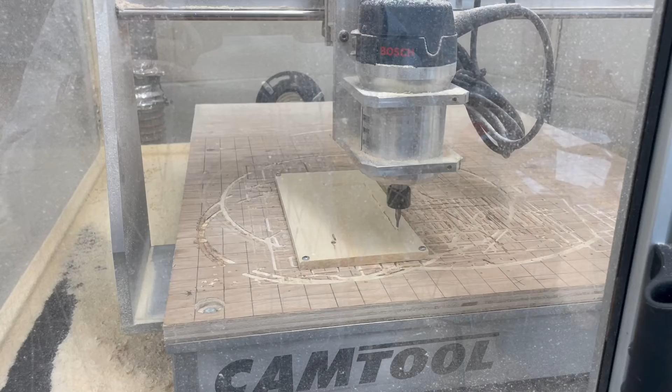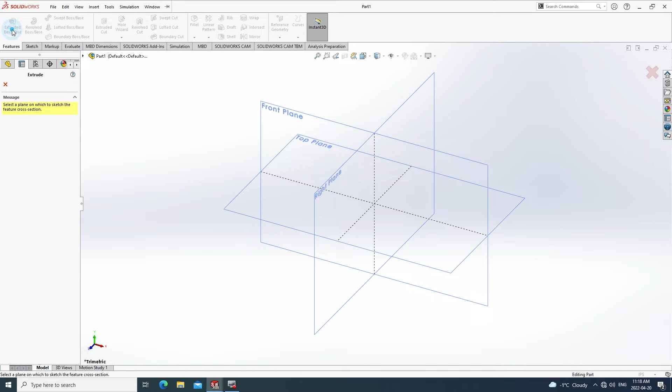This is going to allow us to select the plane, and we're always going to be working on the front plane. So we can just go ahead and click on that. And then from here, we're going to use our origin. So this is our two arrows that point straight up and to the right of our screen. And I'm going to go ahead and select rectangle and go back to my origin and click and drag out, basically creating a square on my screen.

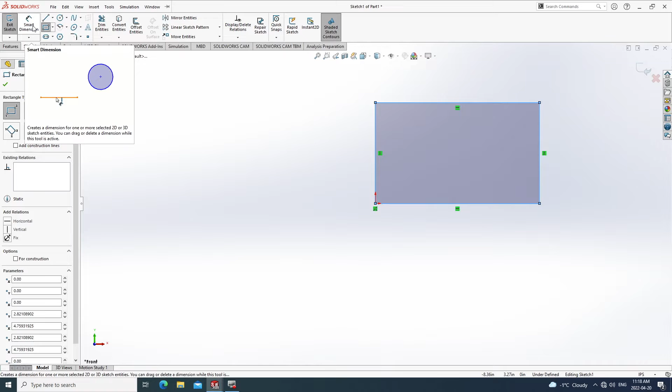From here I can just click again, and don't worry about dimensioning anything right now because we can go back and do that just shortly after, which you can see me doing here now. So I'm hitting Smart Dimension, dragging out either side, and then I can just go ahead and type in. Once I click, it allows me to type in however high I want my object to be. Then I can go ahead and do the exact same thing for the bottom here.

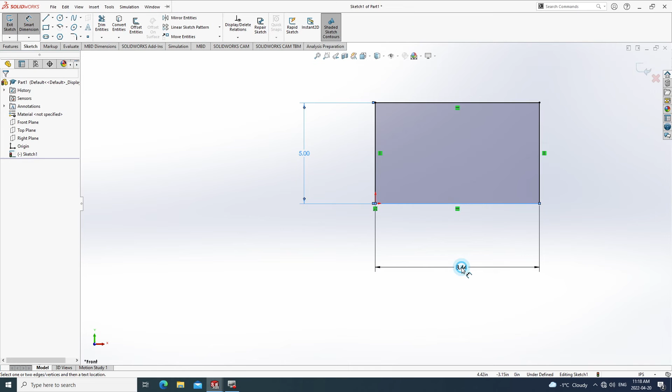And this is the way that I'm going to do all the height and depth and everything like that when it comes to creating objects in SolidWorks. I'm going to go ahead and leave the sketch. That's this button in the top left corner here. When I leave the sketch, it allows me to extrude it so I can push the object back and create some depth.

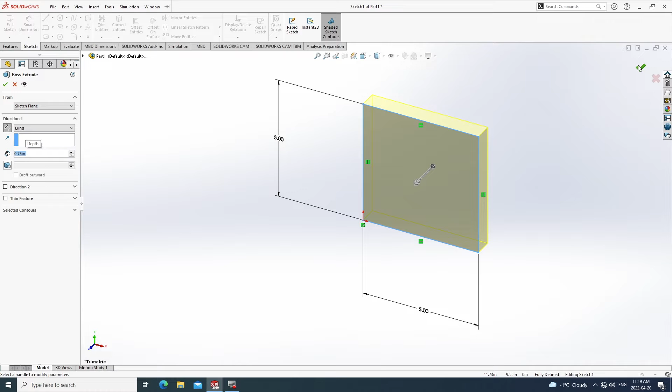From here then, I can go to the side and I can decide how deep I want my object to be. So this now is slowly starting to look more and more like an IQ tester quiz. Then I can go ahead and hit the check mark here in the top right corner, and now, as you guys can see from doing those 4 or 5 small little steps, I have an object.

So now with our IQ tester, what we want to do is create our holes. So by doing this, we're going to go back and click on our sketch and select circle. We're then going to have to decide what face we want it to be on, and obviously we're going to select the front. So we're going to first draw a circle, and then we're going to go and smart dimension that circle.

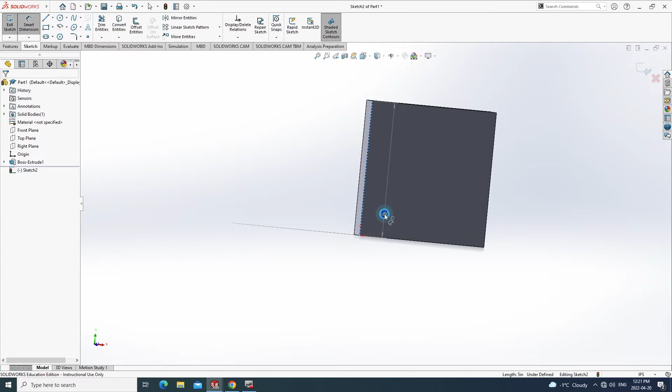From here, we'll go back, click on Smart Dimension, and we can click on the middle of the circle and either side to tell the program how far we want the circle to be off the side, off the bottom, and then we can also do the radius, all using Smart Dimension.

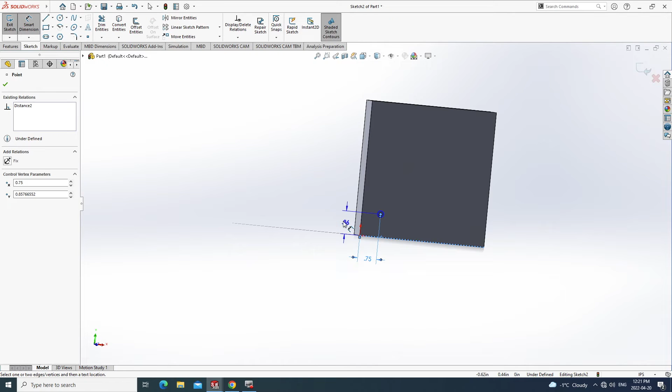So here, I'm just going to go to the side. I'm going to type in how far out the distance I want my circle from the edge, 0.75. And again, I'm going to do the same thing for the other side. At 0.75. And then I'm just hitting enter. So now we got one circle almost done.

Let's grab the radius. So we're going to click on the edge of the circle and drag out. This one only needs one click. And then we're going to type in the radius of our circle and hit enter.

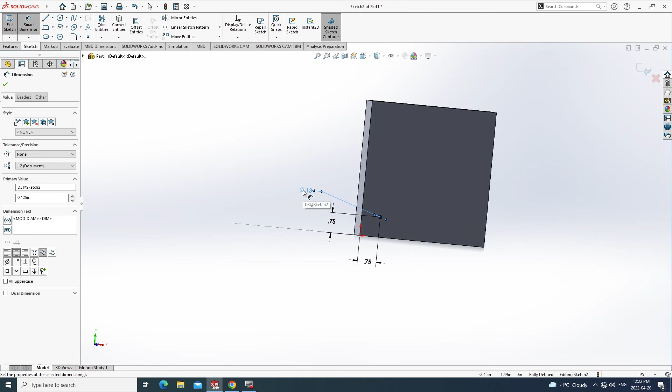From here, now what we're going to want to do is make all of our circles. And thankfully, we do not need to drill all of them individually. We can use the function called linear sketch pattern up here, shaded dark. You guys can see it above. I'm pressing it right now. There we go. And we're going to go over and we're going to edit our D1. So that's distance apart. And we're going to change that to 0.75. So this is how far each of the circles are going to be apart from one another.

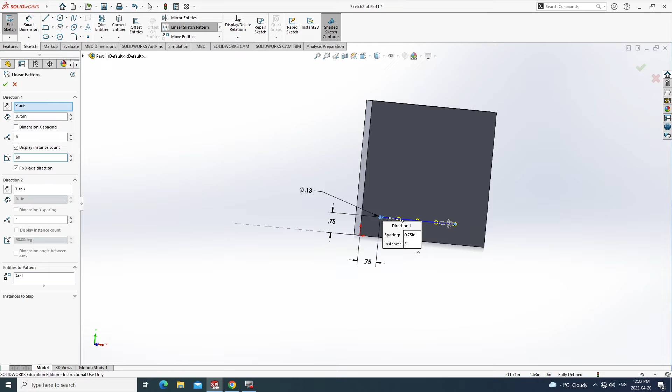Then we're going to edit the number of holes that we have. So we want to change the number of holes from 2 to now 5. And you'll see them span across our object down below. And then finally, what we want to do is we're going to change the degree. So rather than being 0, we're going to change it to 60. So the holes go up across our object.

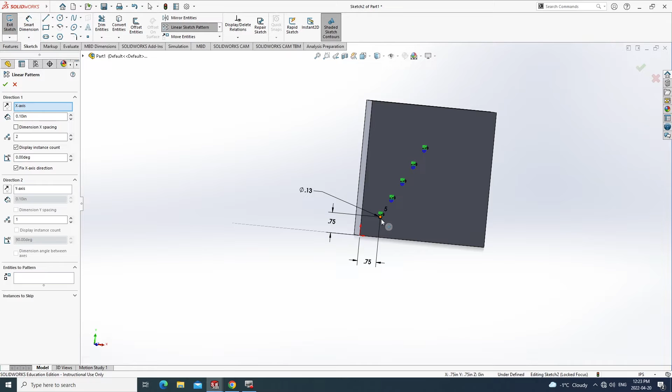Now we're going to go ahead and select the bottom circle and do the exact same thing we previously did, except now we don't need to edit the degree every single time. We can just have the degree set to 0 because the holes are just going to go across the object. So here I'm going to go select the circle, and then I come over to the side and I'm going to change the distance apart to 0.75, and I'm going to change the number of holes to 5 again.

This can be a somewhat slow process, but given that it's a tutorial, we are going to go through the whole thing. So again, I'm over here going to add in my bottom row of 5 circles, and then basically I'm going to do the exact same thing until I have all my circles in place. So again, they're all going to be 0.75 inches apart, and that's changed in my D1. And my number of holes is changed every time. So there you go, there's my second bottom row.

Now I'm working on the third row here, ensuring that all my measurements are the same throughout. Here we go, my third row is now in. And then one last time, we got to put in one more circle. So we're going to make sure that that's the same throughout.

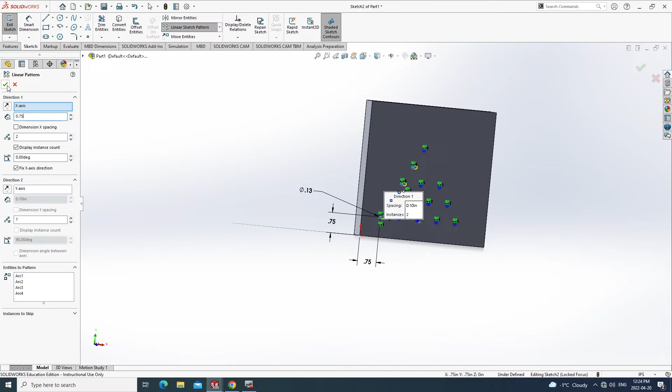So once we have all our circles on our object, we're going to go ahead and click this cube above and change our view. By changing our view, we'll be able to see when we have our holes perfectly drilled through the object, whether this be fully through or not fully through. So now we're going to go ahead and select all the dots that are on our face. So basically we can extrude these then the exact same distance through our stock.

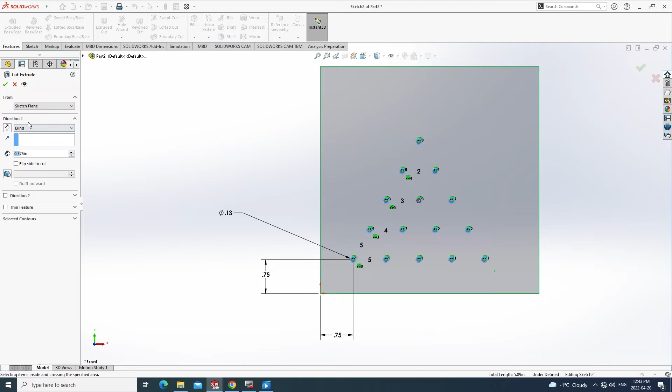Once I have all my faces selected, under the features I'm going to be able to hit extrude cut. From here I'm going to go ahead and ensure that I'm on blind, and I'm going to ensure that my D1 is set to 0.375. From here I'm going to be able to rotate my object, and I can see that the holes have slightly gone through the object.

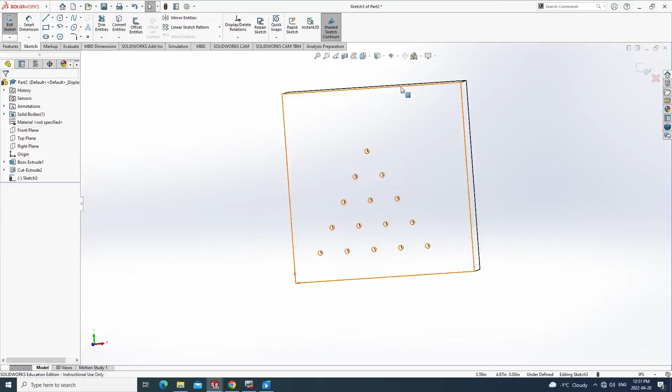So now we're going to go ahead and change our view back to the solid isometric view by pressing this box right here, the top one. Then we can see that our holes are drilled through by seeing the inner side, this lighter gray.

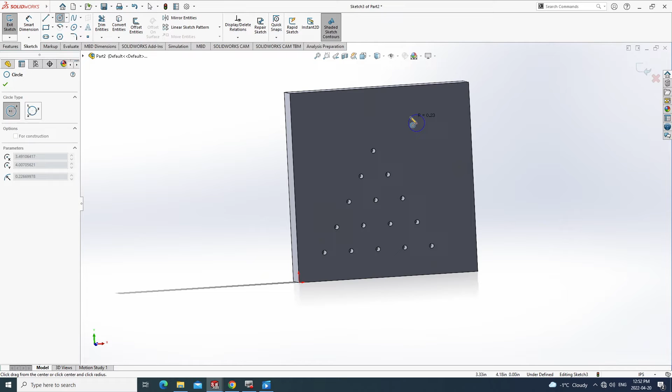So now we're going to go ahead and begin to drill our larger hole that holds the pieces. So we're going to select circle and then our face, and create the circle like so. Now we're going to use our Smart Dimension tool on the left to determine how far off we want the center of the circle from the edge. And we're going to click here, type in our distance.

So that's 1.25 from the center of the circle. We're going to go ahead and do the exact same thing for the other side. You can drag them up top or bottom, whatever you like.

And then after we get that typed in, we just press enter, and that snaps right to where we want it to. We're going to go ahead and get the radius. You can tell you have the radius when you have that circle with a dash through it prior to the number. I'm going to type in the radius, and there we go.

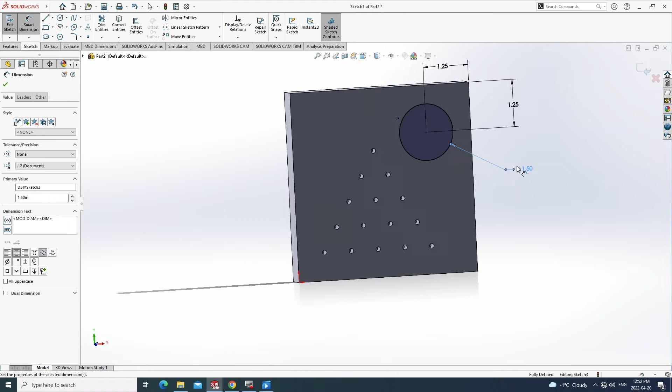So now basically what we have is another circle that we need to extrude through the object, because this is what's going to hold the plastic piece that carries the rest of the smaller fine bits.

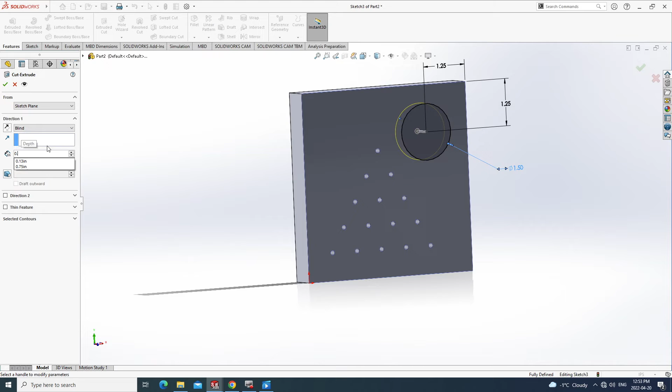So now that we have our circle dimensioned, we're going to go ahead and hit extrude cut. And given that we're still in the sketch, the program is going to know what cut we actually want to extrude. So we're going to type in the depth of how far we want the cut to go through at 0.5 and hit OK on the check mark. So now we can tell that we have the circle cut out halfway through our object.

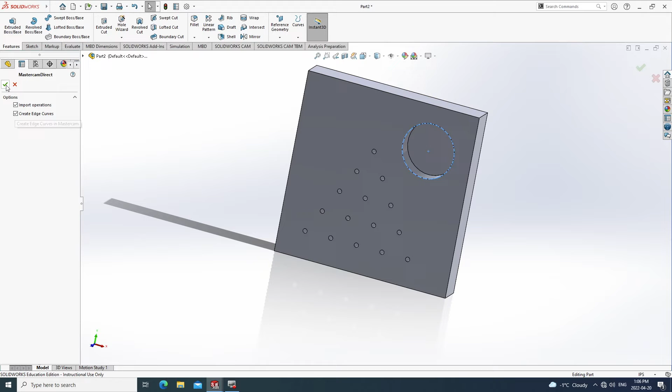So now we're going to send our SolidWorks project to Mastercam. The first thing we're going to do is go to Tools above. We're going to come down to Mastercam Direct and click on Mastercam. It's going to take probably a few minutes to load the Mastercam icon in our SolidWorks screen, and this is going to send over directly.

What's different with Mastercam is that we need to basically do things in a reverse order. We don't open Mastercam and go find the file. We open the file through SolidWorks. This makes things a lot quicker, despite it even being a little bit slow right now.

So once our Mastercam officially decides to load, we'll get prompted with this screen. I'm just going to close this down for now, and we're going to take a quick look at our object. I'm just using the scroll button on my mouse, and then I'm holding it down and panning it side to side, just like so.

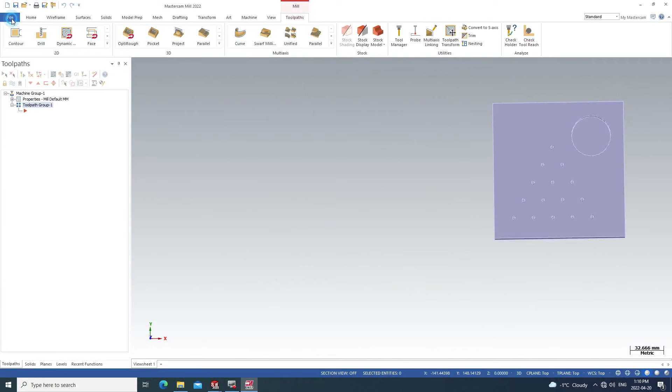So once we're in Mastercam and we're ready to start, our first step is to go to the top left hand corner, select File, and then move to Configuration. We basically need to change our units right now. So we're going to go to the bottom bar here, and change the current setting from metric to imperial. So we see it changing to inches.

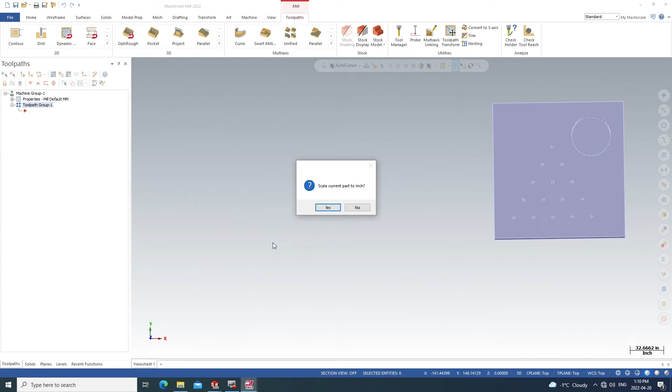We're going to select OK on these statements that come up, and finally hit the OK check mark, and then change our object to inches by pressing yes. You then can right click and hit fit. This will bring your object right up close.

From here, we're going to select machine. We're going to press router and tell the system what router we want to send it to. We're going to click on the Larkin. We're going to see that get dropped down in the menu below. And then we're going to click on machine group number 1 and hit delete on your keypad. From here, we're going to click on properties and then files on the drop down menu.

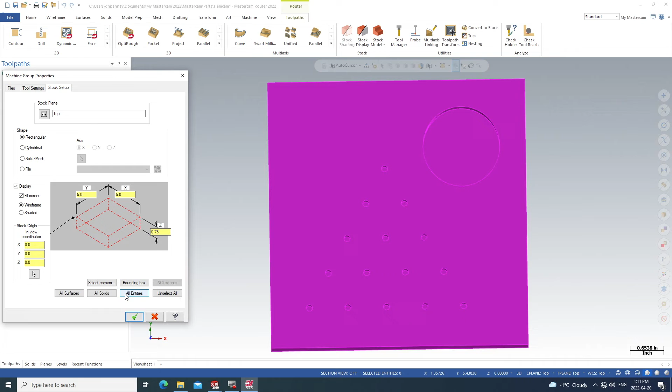When we click, a new window opens where we have to go to tool settings. We will turn on warn of duplicate tool numbers. From here, we'll click on Stock Setup. We'll bring our cursor to the top plane, click All Entities once we are finished, and we will see the numbers change to spec, and then we're going to select OK. Then we're going to move to the drop-down menu in the top left corner.

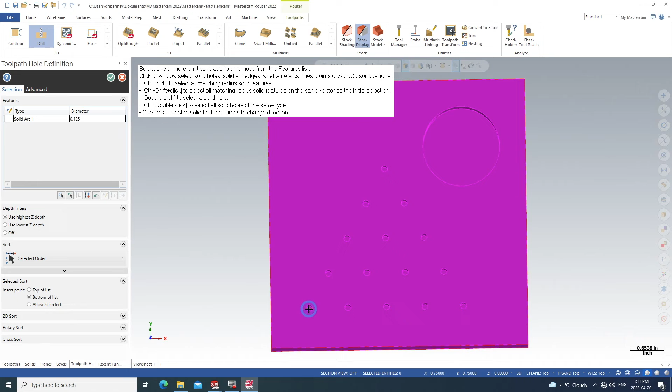We're going to select Drill, and we will see a new menu appear on the left side. We will then drag our cursor over all the holes, and the software will know to select all holes drilled at the same depth. So right now I'm just going to the top left corner, dragging my cursor over all the holes, and then you'll see that they are selected.

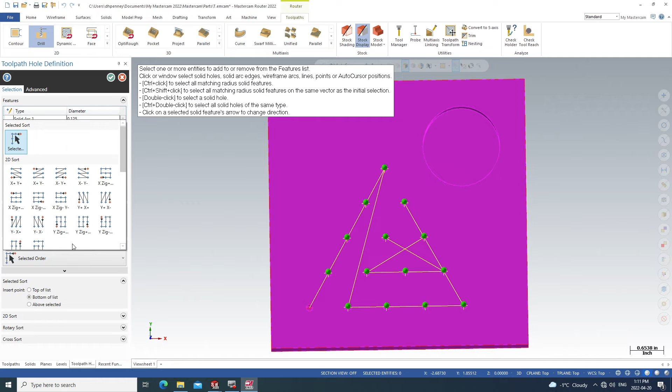From here, once we see that they're selected with the green dots, we're going to move to Selected Order and select one of the zigzag options for best efficiency. From here, we'll see all the holes have been added under the toolpath hole definition. We're going to go ahead and hit the green check mark above to verify. Once we hit the green check mark, another new window will appear.

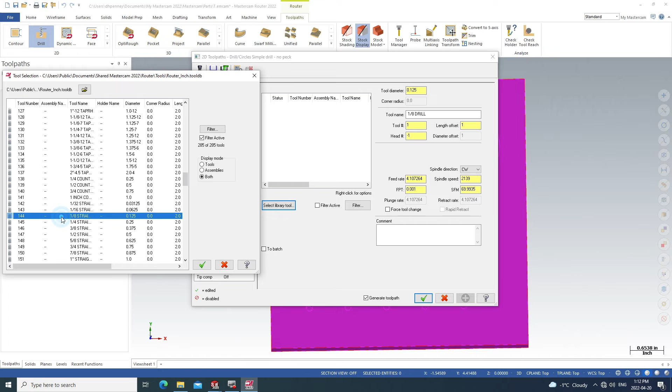We're going to select Tool and hit Select Library Tool, where we will pick our bit. In this case, I know that my bit is number 144, being 1/8 of an inch straight cut. I'm going to scroll down and I'm going to select this by hitting the green check mark.

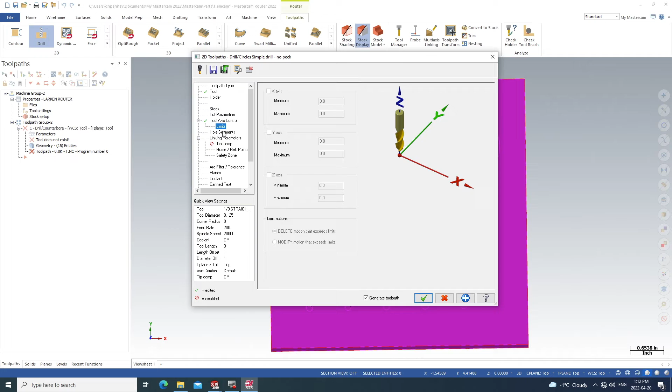As we move forward, we'll see many options. In some of these, nothing will change. So in Holder, we'll see nothing change. In Stock, we will see nothing change. In Cut Parameters, we'll also see nothing change. Tool Axis Control, nothing changes. Limits, nothing changes, nor in Hole Segments.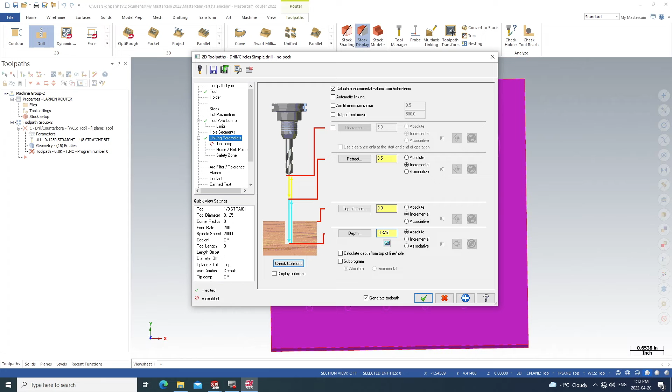Once we get to the linking parameters, we're going to come to the bottom and change our depth from incremental to absolute, and change our value to negative 0.375, because we are going to be drilling this depth through our stock on the CNC router. As we continue to go through, we see tip comp, and we're going to go and hit the green check mark.

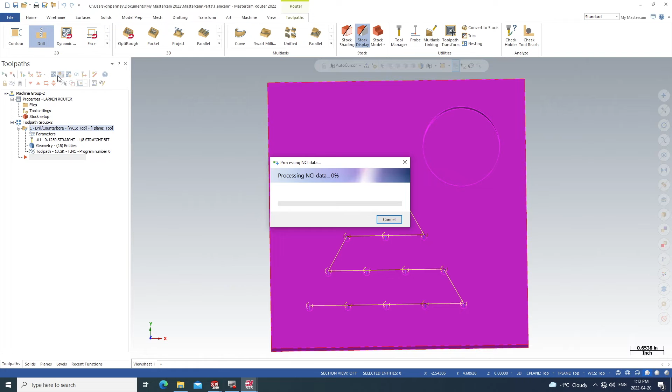From here, we will hit Verify Selected Operations, and this is basically going to show us what we actually have programmed over the last couple of steps with the drilling. So as this verifies, we're going to see a new window come about. We can full screen this here and change our view slightly so we get a better angle. We'll change to isometric. Then we can hit play at the bottom, and we can see that our holes are being drilled out.

From here, we'll hit the X on this window, and now we'll have all the small holes complete, and we're going to move to the larger hole. So to cut this hole, we're going to select Pocket in the menu above. We're going to see a new window come about. We want to make sure we have wireframe selected, C-plane, and chain.

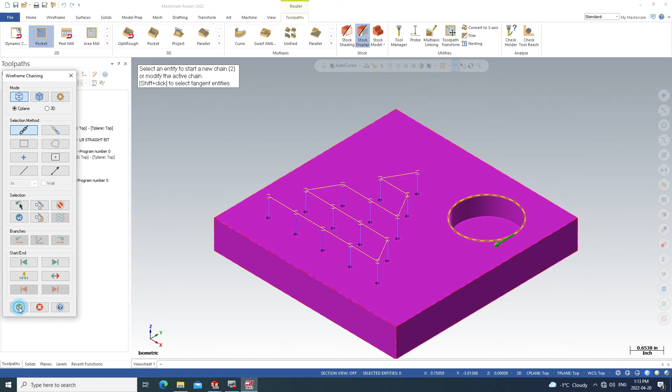So then we will click on the top edge of our circle to show what way we want to cut. Then we'll move over and we'll change the direction because we want to move counterclockwise for these cuts. We will then hit OK on the menu bar and be prompted again by a new window similar to the last time we cut our individual holes.

Here we will select Tool to ensure we still have the 1/8 straight bit selected. As you can tell, we're all good. Then we'll move to Cut Parameters, where nothing will change. Then into Roughing, we're going to select Spiral for drill path. Use the bar here and we'll scroll over. The last one is true spiral.

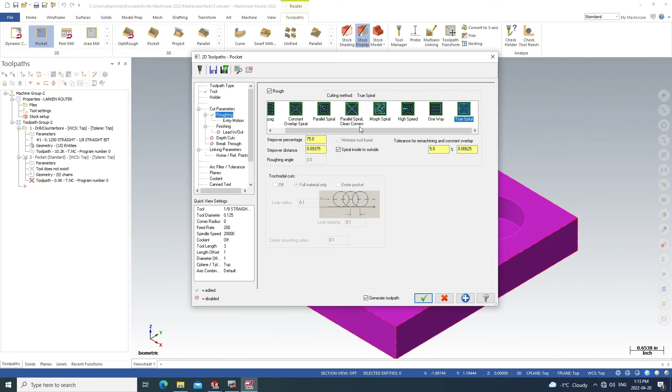Then we'll move to entry motion. We're going to turn this off. Then we're into lead in and lead out, where we will see no change. Depth cuts, we will turn on by ticking the box. And then we are going to change max rough step to 1/16 of an inch. When I hit enter on 1/16 of an inch, it's going to go to 0.0625. So it converts it for us.

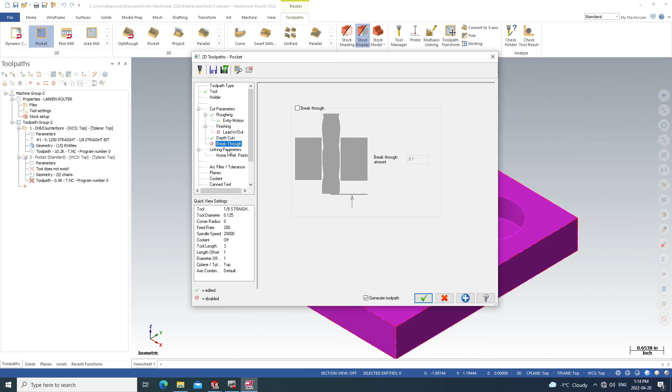In breakthroughs, we're going to see no change. And then finally, in linking parameters, we're going to change incremental to absolute and change our depth to negative 0.5. Once this is said and done, we will then proceed to hit the green check mark in this window, like so. So similar to before, we're going to hit Verify Selected Operations, where we will be able to watch our drill path for our pocket.

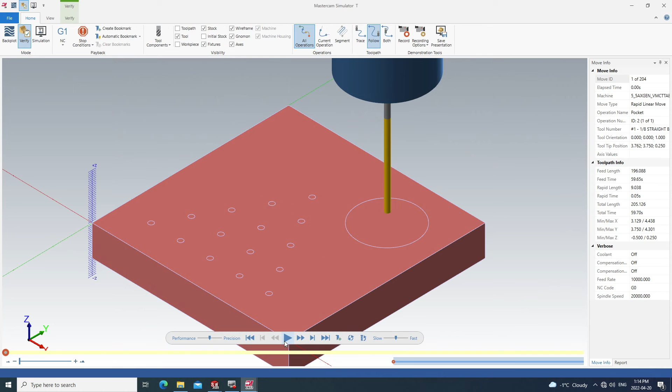So drill's going to work here now once we hit play. It takes a quick second, so all looks good. Basically now we can close this window out because we know it did what we wanted it to.

And then from here we will go to our drop down menu and select contour. And again, we want to ensure with this cut that we're doing around the outer perimeter that we select wireframe again, as we see here. And we want to make sure we're still on the C plane, and then we want to make sure chain is also clicked.

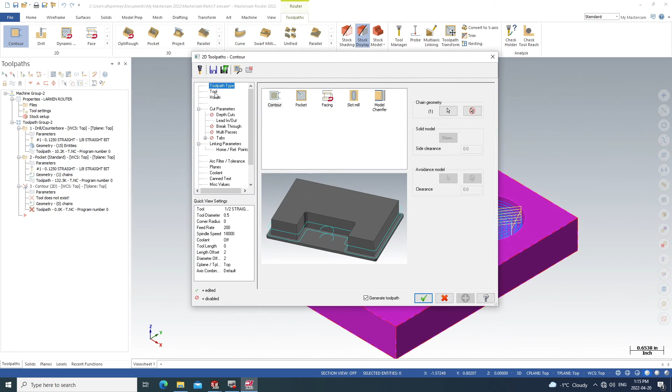Then from there, we're going to move over to our object and we're going to select the top plane. So now we see our green arrow is on the top, and we're going to hit our green box because that is where we want it. Once we hit the green box, a new window will open where we will select tool and ensure we have our 1/8 straight bit still selected.

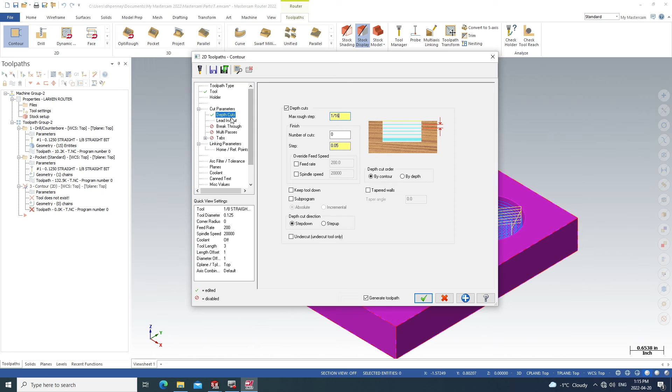Then holder, we will see no change. Cut parameters, no change. Depth cuts, we're going to turn on by hitting the check. Then set our max rough step to 1/16 again. Then we'll go to lead in, lead out where we see no change. Breakthroughs are going to be no change. Multi-passes are going to be no change. But tabs will need to be turned on.

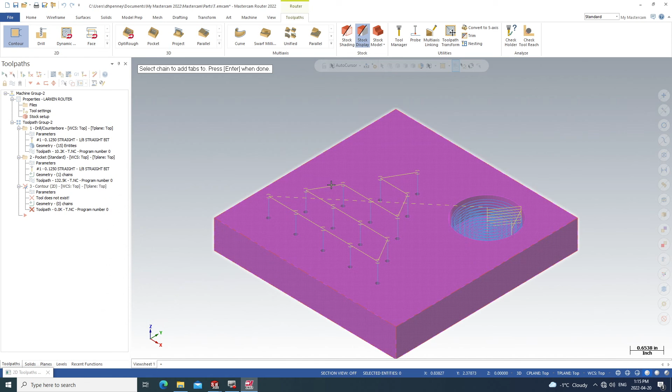We will then change our ramp tabs to vertical because the CNC router does not like to move on a diagonal while it's cutting the outer perimeter. We're going to change our tab thickness to 0.125. Then we will hit position, and when we hit position, we'll be able to place our tabs on either side of the object.

So right now I'm going to scroll over, I'm going to grab one side, and I'm going to click on the edge, and it's going to give me 2 yellow lines, and that will tell me that there's a tab going to be placed there when I begin my cut. Then again, I can scroll in or scroll out, and I'll grab the other side here as I rotate down. So now I'll have 2 tabs going diagonally across from each other, and you can choose where they go on either side.

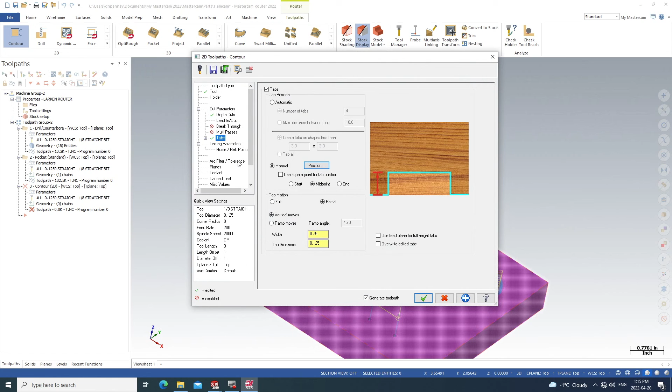Then, to bring back my window, I'll hit enter, and we will edit the linking parameters again, changing the depth from incremental to absolute, and then changing our value to negative 0.8. Once we get all this done, I will hit OK, the green check mark on the bottom, like so.

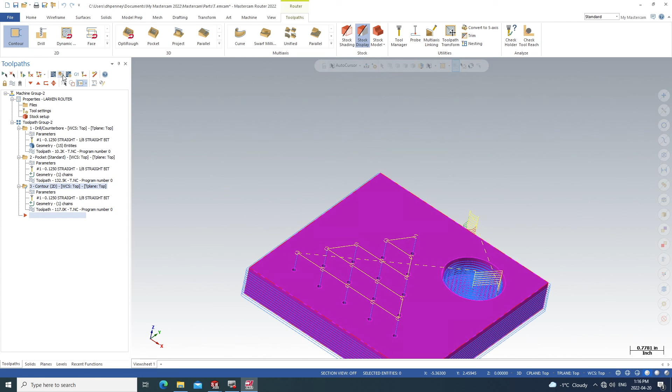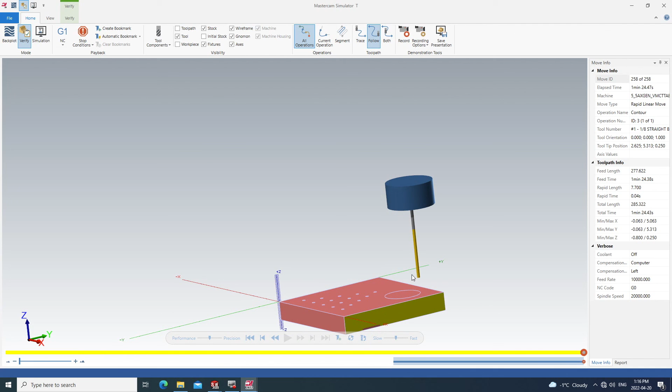Then I'm going to proceed to hit Verify Selected Operations, small button over here on the left side of the screen, and it'll take me into my window with my drill, and I'll be able to put this into isometric view again and watch my whole router drill out my piece of stock exactly the way I want it. Well, there go my tabs actually, so the whole thing is not being cut just yet. See, now we can see my tabs in place on either side. That's that small piece, it's 0.125 thick. So I can close out this window.

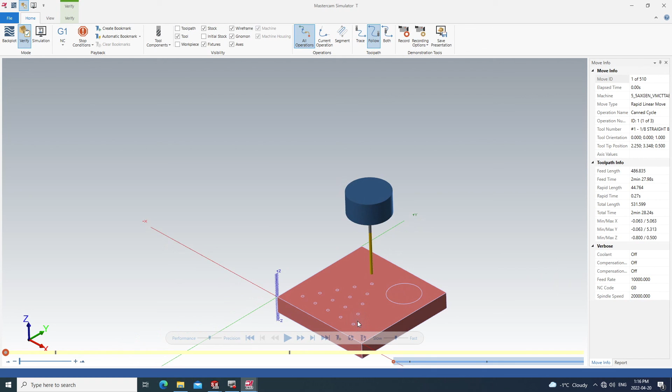From here, I'm going to go over and select View All Toolpaths, which will basically help me simulate the entire effect of what's going on right now. So all these toolpaths are going to happen. Now, considering I selected that, I'm going to click Verify Selected Operations. This is going to prepare the whole thing for me. So now when I click on Isometric View and Shift Out, and I hit play, this will simulate the entire process of the router. So my pocket, all my holes, and then my tabs on both sides are all going to be cut.

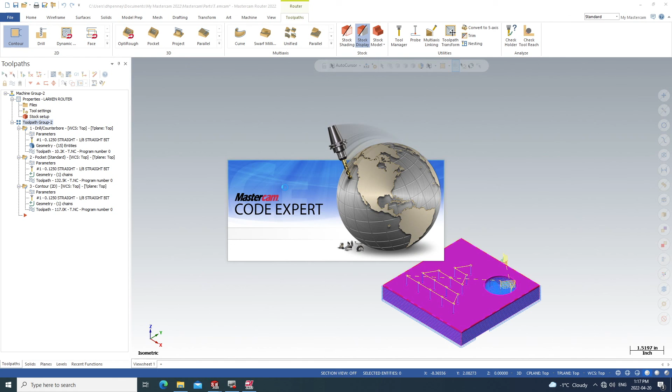So then, when I exit this and verify tool path group 2, I can click on my G1, and this is basically what creates our G code, so the CNC router can understand what we want to have happen. So then what we'll do is I'll save this as IQ test. Hit save. And then basically this process is as easy as taking the .nc file and shifting it to an external drive and then plugging it into the computer that's hooked up to our CNC router.

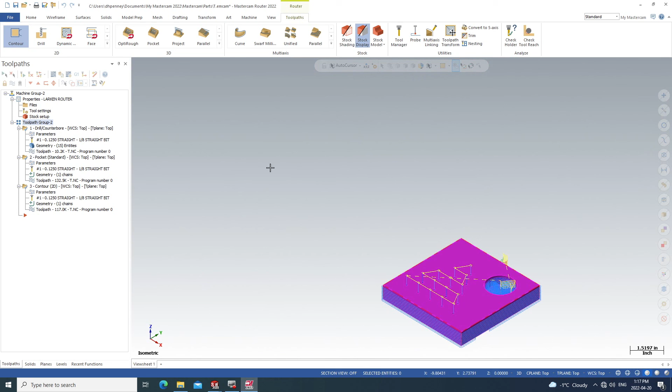So here when we look at this code, we have hundreds of lines of code, 600 and something odd lines. Very glad that I do not have to write this out. We can hit X on that and save our project. And that's going to bring this tutorial to an end. The rest of our work is going to be done in class using our .nc file and our CNC router.